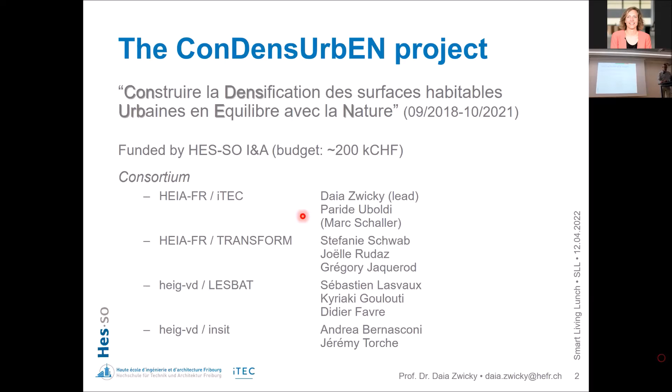The consortium was composed of different institutes within HES-SO. The lead was with us at iTEC, the Institute of Construction and Environmental Technologies. I would like to point out in particular the name of Paride Uboldi, the main collaborator working on this project. So essentially this is all his work. We had a strong implication of Transform of HEIA as well, with Stefanie Schwab above all as a lead. And we had two further members from the location in Yverdon of HES-SO. One group, LESBAT, is specialized in energy of buildings and eco balances. And the last group is associated to timber construction.

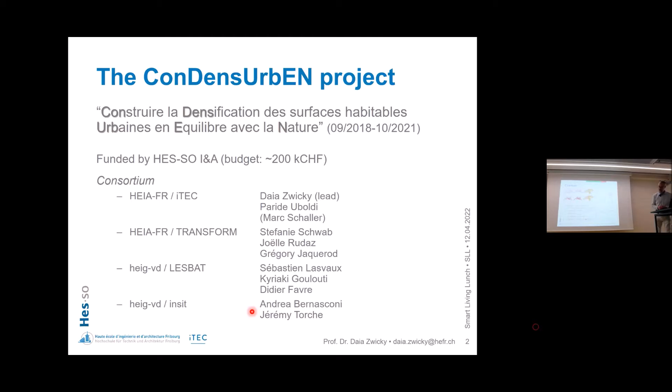Well, we could use industrial fallows, friches in French, like where we are here. So we could demolish everything and build very dense on this zone of the Smart Living Lab. But as we can see in this very zone, there are probably better ways to work with the spaces that are freed at the city center, like creating parks and recreational areas, or locating a living lab, for example. So that is certainly a way to go, but how many opportunities do we have?

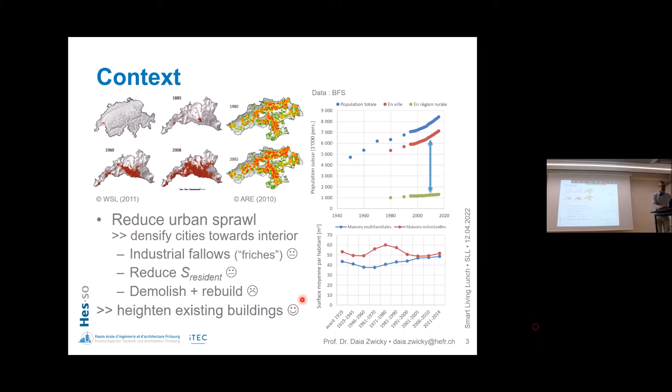So in our opinion, the best way to go is to heighten existing buildings. And this is exactly what we have looked at in this project. What is done today, you can see in these few pictures. Usually it's 1 or 2 stories more, maximum 3, usually built in timber or steel. When it comes to the construction itself, the only thing that counts in the tendering process is money, obviously, while respecting requirements with regard to thermal insulation, acoustic insulation, fire protection, but the ecological impact is hardly considered.

That was the question that we have been asking ourselves. Are there other, possibly better solutions, and how to do them? So one requirement obviously is that the construction should be as light as possible, because as such we can add more floors.

I have to precise, we didn't look at what is the impact on shadowing and stuff like that, but we looked at the individual building and how to construct this. And then obviously we were also interested in the question.

So one thing is the financial impact, one of the 3 pillars of sustainable development, because we cannot spend that much money either. Obviously, respecting any kind of building physical requirements and structural requirements, because I should precise, I'm a structural engineer, so that's what we have been looking at. And we wanted to know, is this possibly opposed to ecological impacts of the added structure? So that's where the EN comes from, equilibrium with nature.

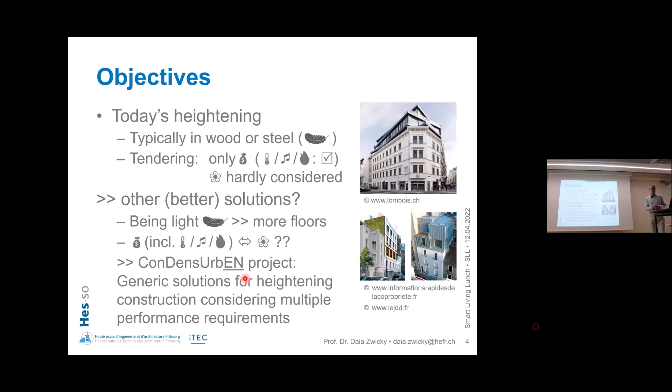And the general objective of this project was thus to develop generic solutions. We didn't go till an execution project, but generic solutions for the construction elements applied in heightening of existing buildings, looking at different performance requirements that are imposed on such constructions. Again, the project limits, we limited ourselves to generic constructions, considering the primary or load-bearing structure, as well as the finishings or secondary structure. From a structural point of view, we did not go to the very last detail, but we did rather something you would call a pre-design.

And in this context, we already limited ourselves more in the sense of we didn't want to mix too many disciplines, in the sense of the walls are built in steel while the floors are all built in timber, because it requires 2 different disciplines on the construction site, which is usually not appreciated.

And we didn't go, like I said, to an execution project, such that we did not really profoundly analyze construction details and connections, etc. But it's rather a general composition of construction elements and what is the impact from an economic point of view, so on the money side, and on the eco balance side, where we've been looking at embodied CO2 or embodied carbon above all.

Also, we did not perform deep studies of building physical aspects, but for example, with regard to thermal insulation, we only made a general check of the U value and not every single thermal bridge considered. And with regard to acoustic insulation, we could frequently rely on existing catalogs that we know that this and that kind of composition does provide the necessary performance.

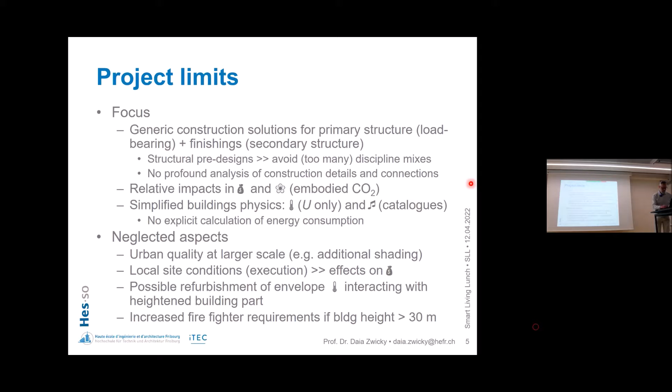So we've been looking at this in the framework of case studies because we wanted to look at concrete cases. We had to, because this determines spans and existing arrangement of structural elements that have an impact on our project.

We started from the eREN projects that were done by Stefanie Schwab from Transform, because within those projects, she developed, among others, construction typologies of residential dwellings, so multifamily houses from 1900 till the end of last century. And this was very useful for us because we had archetypes available with this.

We did neglect some buildings with a current height above 24 meters because we thought there is not that much heightening potential. So it's a bit contradictory to what I just said, but it was to limit our choices. And from those construction typologies, we chose representative buildings as an archetype for intense construction periods.

So one building from just before the Second World War, and one building in the period of the petrol crisis, because they present really typical construction types and modes of the concerned periods, a typical pre-World War II building and a typical post-World War II building that are usually found in different zones. Like the first one is rather at the city center.

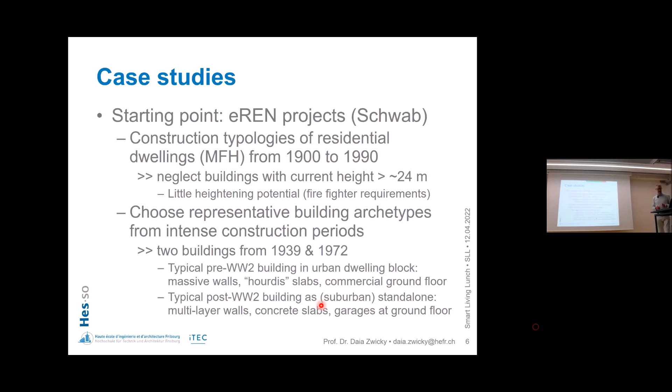While the second building is a typical standalone building, rather in a suburban zone, with multi-layer walls, concrete slabs, and garages at the ground floor. So this first case study is called Borde.

And you can see here we have this hollow block or hourdis slab that only spans in one sense. Essentially, the walls are made of cement bricks. And we already came to the conclusion quite early that we will have to, we assume, demolish what you could call the penthouse. It's usually a little bit smaller than the rest, and the attic, and we construct from there upwards.

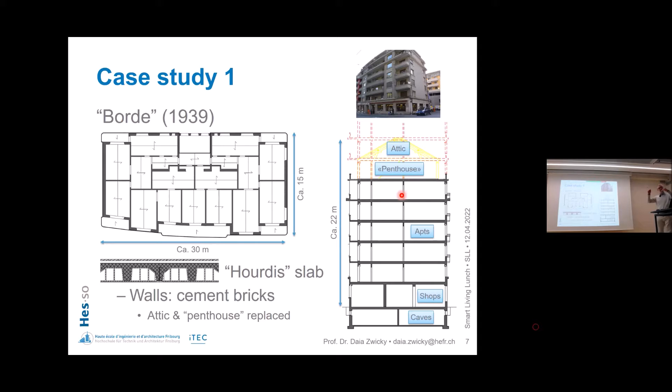The first thing we have been looking at is what is the capacity of the existing structure, with the target that we can identify approximate surface masses of the added floors, because they will definitely have an impact on the materializations of elements that we can apply. And we wanted also to know, do we need strengthening of the existing structure? Or to make it even more detailed, if we applied some punctual strengthenings, would that allow us to add 1 or 2 more floors? So that's the idea behind that.

We took into consideration, obviously, the existing floor plan, and we assumed that we simply copy paste this for additional floors, so that we do not fundamentally change the structural system yet, but wanted to know how many floors we can add, or respectively, what is the dead load per floor that we can allow if we add 1, 2, 3, 4 floors, obviously considering a certain live load.

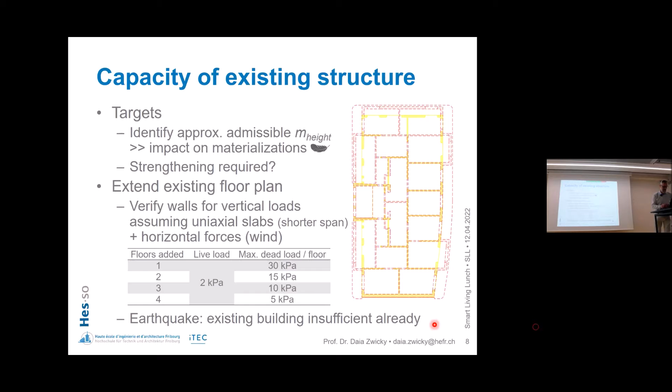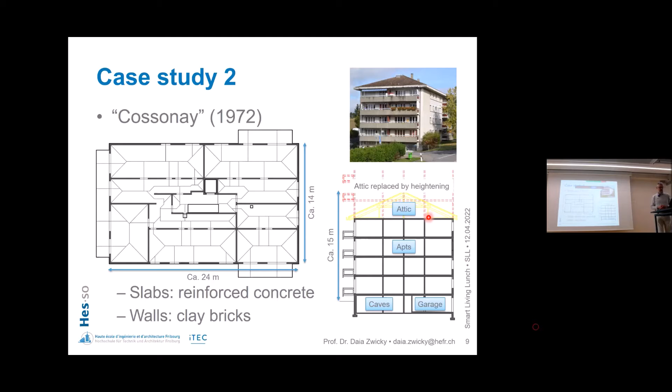The second case study is this standalone building, typical from the 70s, with the walls made of clay bricks and the slabs made of reinforced concrete. Reinforced concrete allows us to admit a load carrying in both senses. Again, we assumed that the attic, which is currently non-residential, shall be destroyed, and we copy-paste the existing floor layout for how many floors we can add.

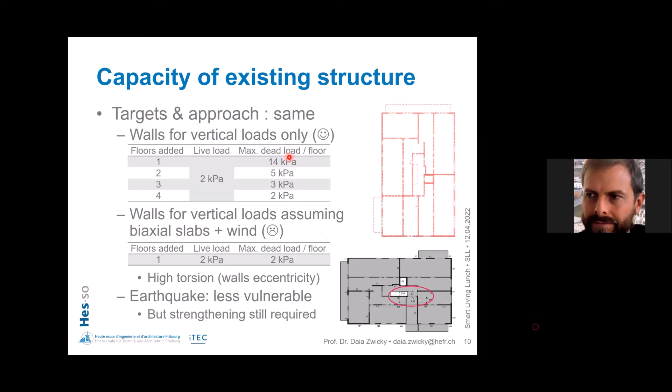We applied the same approach, and we can see if we look at the load carrying capacity of walls for vertical loads only, we can add quite a few floors, like adding 4 floors, still having 200 kilos per square meter for the dead load admissible. But if we look at the combined efforts acting on the stabilization structure, so the walls, from dead loads and wind, we can essentially add 1 floor with a quite modest admissible dead load.

This is associated with the fact that the earthquake acts here where the center of mass is, while the reactions act there where the center of reaction is, and this torsions the whole building and loads the walls additionally. That's why those loads are so low. So we can tell from that we can add very few floors, or we need to apply strengthening, be it for wind loads, be it for earthquake, to add more floors. But this gave us a first idea of how much dead load the slabs above can have, and associated materializations.

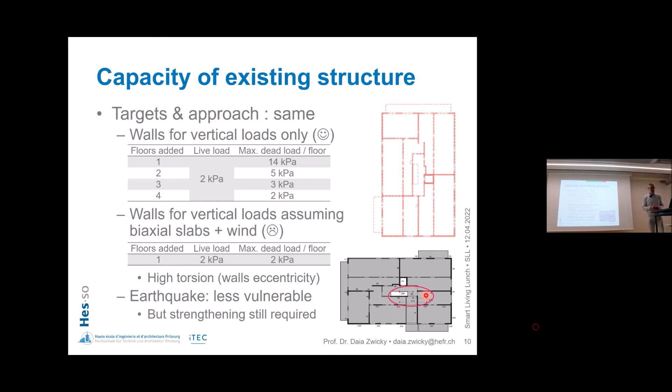So we're now looking more profoundly at the elements of this heightening structure. There are many requirements to be considered. So we have structural requirements. We need sufficient strength. We need sufficient serviceability, so that, for example, floors do not deflect too much or feel like a trampoline. So this requires some minimum thicknesses already. We need to meet certain fire protection requirements, to protect not the building from fire, but the inhabitants from fire.

And we have those building physics requirements with regard to thermal insulation and acoustic insulation, which has different subclasses, like impact noise, airborne interior noise, and airborne exterior noise. So all this has an impact on the compositions of our elements, and many times they have a strong impact on the secondary structure. And this is, unfortunately, a little bit the poor child of construction projects. It has an enormous impact, but it is hardly considered, as you will see later on.

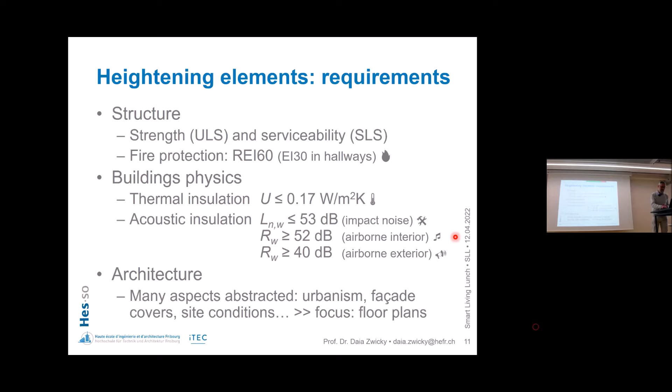We also have looked at what we called an open floor plan, where only core and facade walls would be considered in the loading system. So you see here superimposed, we have really large walls that collect all the forces and bring them down to the existing structure and further down to the soil.

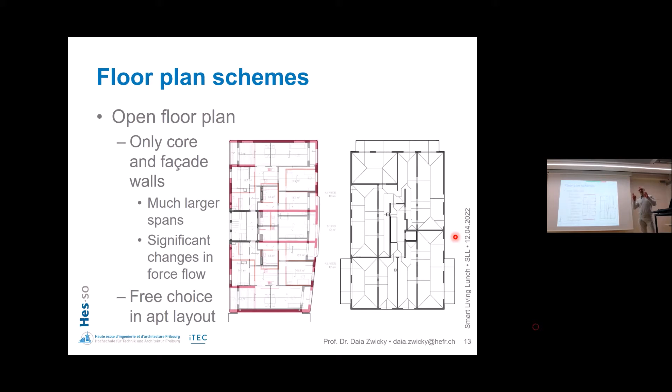Obviously this has a consequence of significant changes in the force flow, but we gain a lot of freedom in the arrangement of apartments and can provide something that is more appropriate for current times. And the same goes for this other building.

These reflections on the floor plan essentially consider architectural requirements on the one hand, and above all, they gave us an idea of what are the spans that we are talking about. We found out then that the first building I've introduced, the Borde building, was worse in the sense that it has the larger spans.

It requires quite important what you call deep beams, mur voile in French. So it's a beam that has the height of a whole story and can collect a lot of forces and bring them down to the foundations and further. You can see this here. This is a deep beam in this section here. So it is a structural element that carries over large distances and can accommodate quite important forces.

As a consequence, we could see that in the one building, we have a maximum span of approximately 11 meters. So we're approaching footbridge spans here already. And the other one with 8 meters, which is quite important as well. So this gave us an idea of what we are talking about in terms of slab spans, and was a necessary basis to do the structural pre-design of our construction elements.

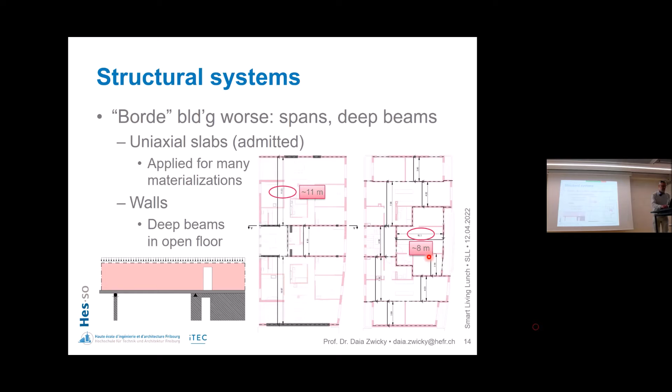We have been looking at many different materializations of slab and wall elements. We could categorize them in the sense that we have elements associated to concrete construction. It's quite intuitive that you will not pour very heavy concrete to construct these additional floors. Still, it is like the reference of what you would do when you construct a new building, and that's why we wanted to consider it.

The same goes for a massive slab, but this time using lightweight concrete, or then we have voided elements like with hollow blocks or pre-stressed and voided. So all these elements had to be structurally pre-designed to know what their thickness must be.

We have then also pure steel construction, what we call CFS, cold formed steel. These are very thin steel elements, so it's extremely light, but very sensitive to stability. And that's why, for example, here you need to add a timber plank that stabilizes those elements.

Further going to composite construction, where we mix different materials in relatively typical ways, like using steel elements in combination with concrete slabs that provide additional stiffness and strength. We could find such proposals in the literature, where we have cold formed steel elements that are insulated or made light with a hollow block made of insulation material, but still adding concrete for additional stiffness. It's a, let's say, commercial system called Coffradal.

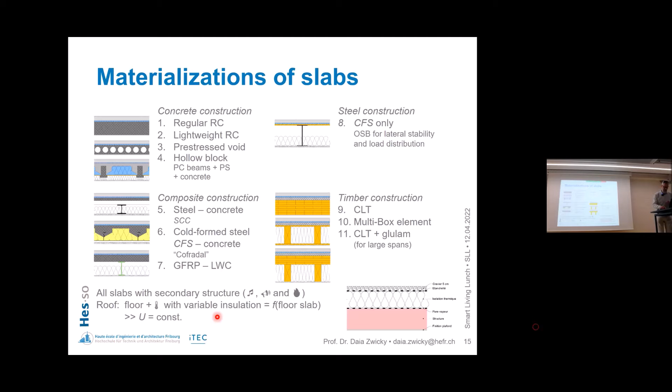So roof, same as a floor slab, but with insulation. And then we had to dimension all this, obviously, for the variable spans. You can see here an overview as it gives you an idea what we are talking about in terms of depth of the total element, in terms of dead load of the total element, and this obviously to be combined with what can we add.

And you can see we can go from something really, really heavy in regular concrete, so almost 1.3 tons per square meter. So that's a regular car per square meter as a dead load, which is extremely heavy, to something very, very light if we construct with these cold form steel elements. We have been considering spans going from 7 to 11 meters.

We essentially considered simple span slabs because we have many unidirectional elements. So like such an element here that has one load carrying direction. Also elements like these, they carry in one way only. It was only for elements made of massive concrete that we considered a certain contribution in both senses or also continuous.

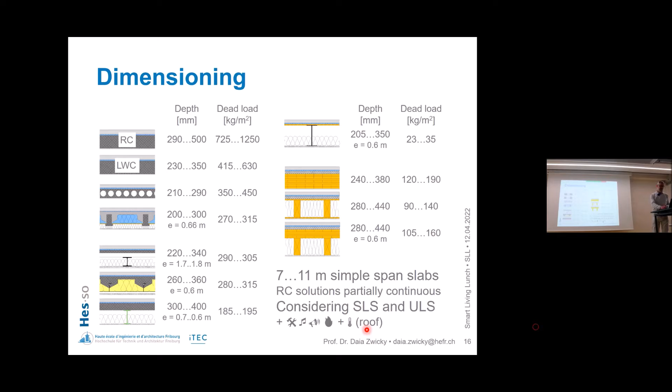Obviously in the structural design, all the requirements that are imposed for serviceability and strength, plus adding all the necessary layers for satisfying building physical requirements. Something similar we did for the walls, again in different categories: concrete construction, steel construction, polymer construction, or timber construction.

We looked at regular constructions like massive walls made of normal concrete or lightweight concrete. We also looked at prefabricated panels that incorporate an insulation made of EPS, but also looking at ultra high performance concrete, with the objective to make those elements even thinner. Because this is something I should have probably mentioned at the very beginning.

If you want to construct very light for your heightenings, you can do it in two ways. You can take usual dimensions with light construction materials, so let's say timber as a light material in a regular dimension of, I don't know, 20 centimeters. Or you can take much heavier, but higher performing materials and make very thin elements. And as such, the mass overall is comparable.

And that was exactly the way we have looked at it in the context of these conceptual designs for those different materializations. We also had to add some non-structural walls, but there we made our life easy. We considered one type of composition for internal non-structural walls and another type for external non-structural walls to not make life even more complicated.

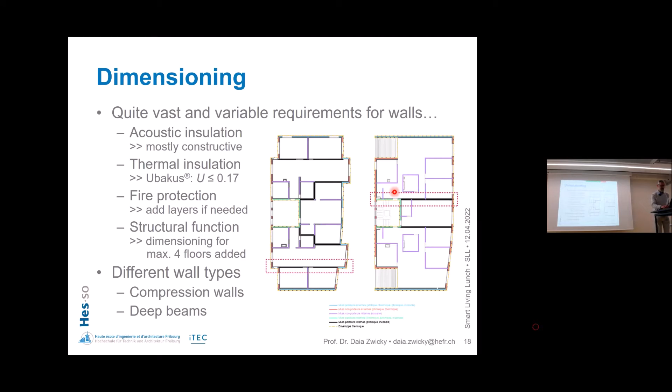So we have walls that carry mainly vertical loads only, but then we also have these deep beam walls like the one here or the one there that catch a lot of the additional loads and have to bring it down to the existing elements. For the compression walls, it's relatively easy. You look at it as if it was a column that is 1 meter wide, and you design as a structural engineer must. I don't bother you with those details.

But more interesting are the deep beams, because they have to bridge quite important spans. And we wanted to look at different materializations, like I said. So concrete walls that you usually design with strut and tie models. Steel walls were constructed as a truss, so we could hide diagonals inside to have the necessary structural system.

When we did it in glass fiber reinforced polymer, this is also something that we looked at in an earlier project. How can we make this load bearing if we bolt panels on GFRP profiles?

Structurally, it works. So we also considered this approach, or last but not least, a massive timber wall made of cross-laminated timber, for the different construction modes being associated to the main construction material.

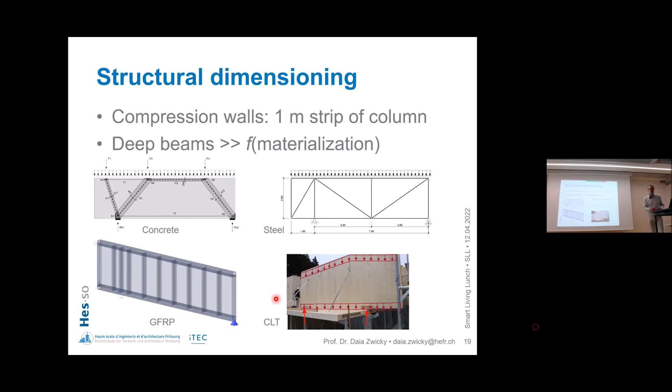Then we also had to look at what you call shear walls. It's the walls that stabilize your building for wind and earthquake, and above all, at the existing shear walls. So I already pointed out that the existing shear walls already require strengthening in the current state of the building. It's always a question if the intervention is proportional or not. But if we're gonna add floors, then the intervention definitely is proportional.

So we had to bring that a little bit further down, simplify it a little bit further. That's why we said we're only looking at two different categories of strengthening: a light strengthening or a heavy strengthening. Heavy is easy. We take the existing wall as a lost formwork and we simply concrete the new reinforced concrete wall against it. It's done in practice. It's not something we've invented. And there you can accommodate roughly any kind of earthquake or wind load you want. No problem, because you add an element.

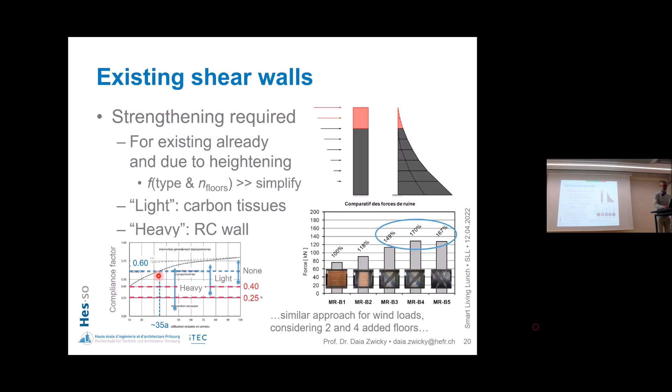And the same we did not only for earthquake, but also for wind loads, considering 2 or 4 added floors. So this allowed us to identify how many elements we need to strengthen.

Now, these slab elements and wall elements, they need to be combined to construct the added floors. And there would be an almost infinite number of possible combinations. If you say, okay, these are all the slab types we've looked at, these are all the wall types, theoretically you can combine any one with the other. And well, we had a comfortable budget, but not that comfortable, so we had to limit ourselves.

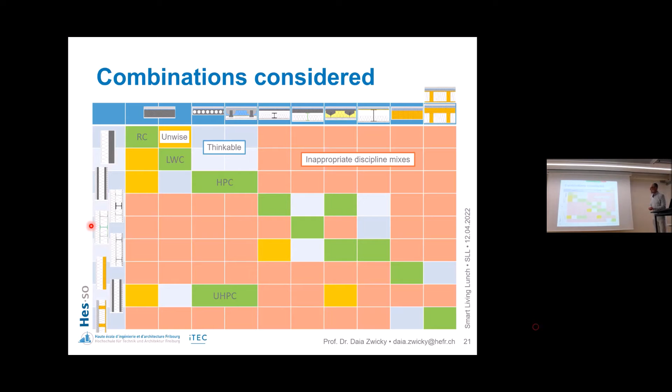And we've been looking at the outliers, so to say. We thought, okay, here we have rather lightweight regular concrete construction, and it would make sense to combine them with lightweight wall construction because elements are thin, or we even combine it with higher performing concrete and thus thinner elements, and that's how the outliers can be justified. Was that a reply to the question? Very good. Okay, so these are the combinations we've been looking at.

In terms of evaluations, we know that we satisfy building physical requirements, we satisfy structural requirements, and we wanted to evaluate the impact of those combinations on construction cost and on ecological impact or embodied carbon. The construction cost we did rather in a qualitative way. We took the material quantities, multiplied them with usual unit prices per material and added something for the mounting of the whole thing.

This is quite approximative, obviously, because the effective construction cost will be very much impacted by the specific site location, access, where can you put the crane, can you put the crane anyway, etc. But we wanted to compare those materializations qualitatively, and that's why we did a normalization to our reference, which was in our case timber construction, which is usually done today. So is the other solution more costly or less costly than timber? Or then we did it within the same material. So it's a relative evaluation, so to say.

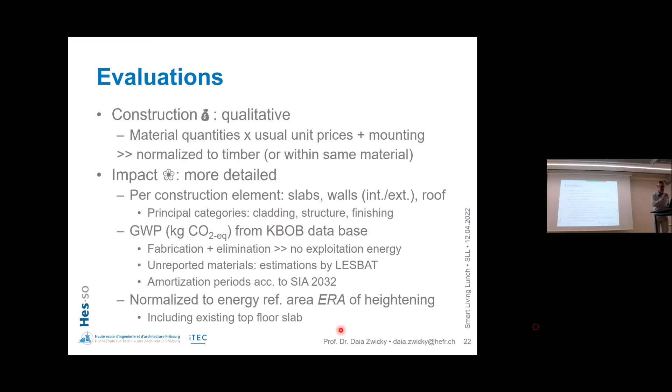Now, finally, some results after all these explanations. Here you can see the results for two floors added with a restrained plan. I'm totally aware that you can read nothing, but I'll give you some explanations. For one certain materialization, you can always see two columns, and this variation is associated with different kinds of secondary structures that satisfy the same requirements. So this gives us a range already.

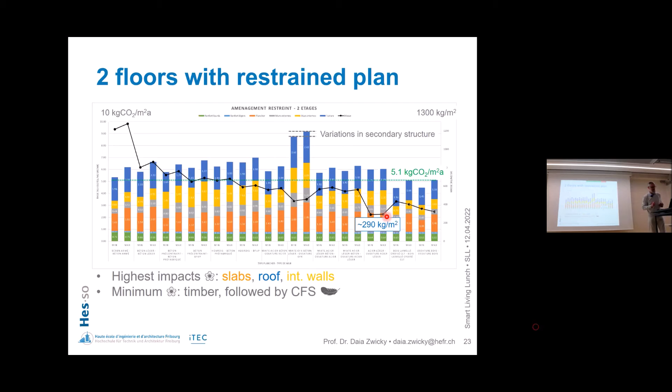From the colors, you can tell the highest impacts are hidden in the slabs, followed by the roof, and then the interior walls. To give you an order of magnitude, the reference is timber with 5.1 kilo CO2 per square meter and year. This gives us the minimum eco balance, followed by cold formed steel construction, which is relatively close to that, the lightest one, down there. But still, it's already 290 kilo per square meter. It's supposedly very light, but not as light as you thought.

All the other solutions, except for the GFRP solution, which is the total outlier above overall, are relatively close to each other. So we can say, if instead of using timber we use concrete, we add like 20 to 45% in embodied carbon. If we use steel-based solutions, it's like 15 to 35% added, obviously considering the maximum in secondary structure.

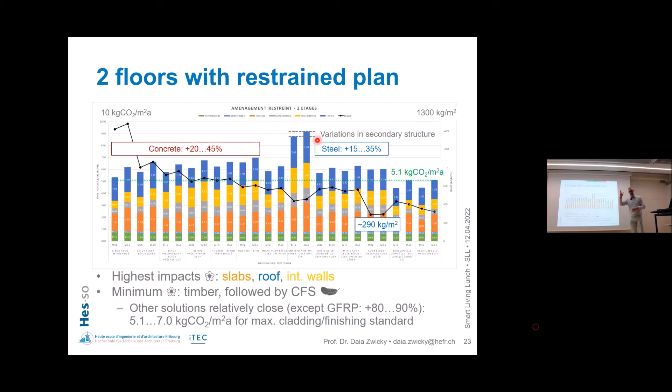So if you look at money, choose lightweight concrete. If you look at eco balance, choose timber. If you want to be as light as possible, choose cold-formed steel. If you would make the elements rawer, so you can omit certain finishings and claddings, then you can still reduce the impact by up to 15% in both senses, cost and embodied carbon, so non-negligible. But you will live with a rawer element.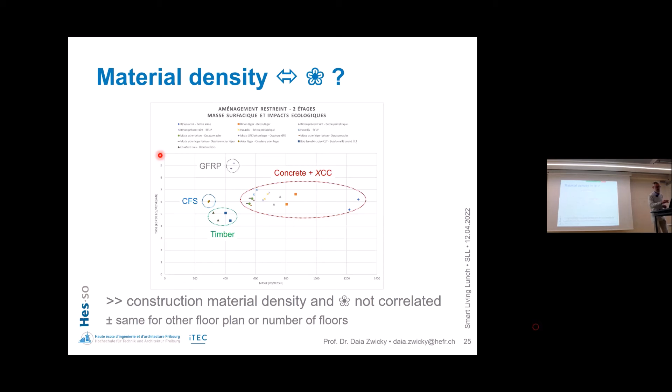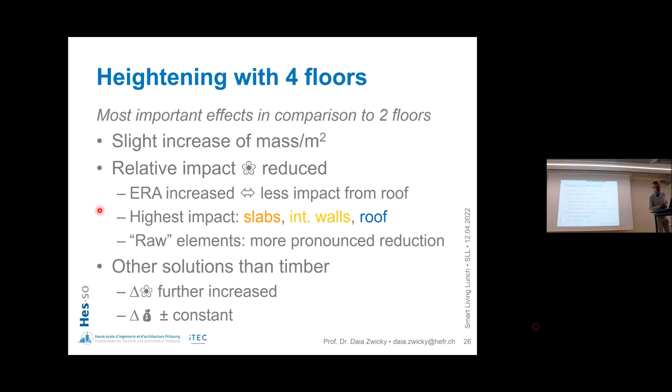Same for a heightening with 4 floors, just the most important results. We have a little bit of increase in the mass per square meter. The relative impact of eco balance is reduced. Obviously, you add more floors, so overall you add more embodied carbon, but that's associated to the fact that the energy reference area is increased. Still, the highest impacts are in the slab, but now followed by the walls and then the roof. And using raw elements would result in a more pronounced reduction. We can say here also, for other solutions than timber, the eco balance is simply increased and the cost remains more or less constant.

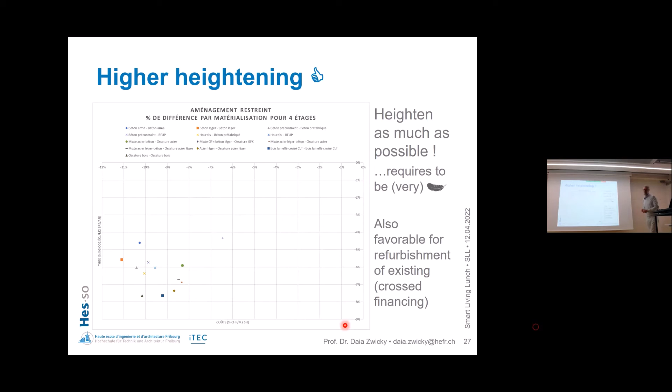We can tell from this figure, for 4 floors, heightening as much as possible is favorable, because it reduces the relative cost impact and it reduces the relative embodied carbon impact, and it's also favorable if we further consider refurbishment of the existing structure, because then we can do some cross financing: the rent from the additional floors can pay to refurbish the existing building. So that's why it's interesting to add heightenings as high as possible.

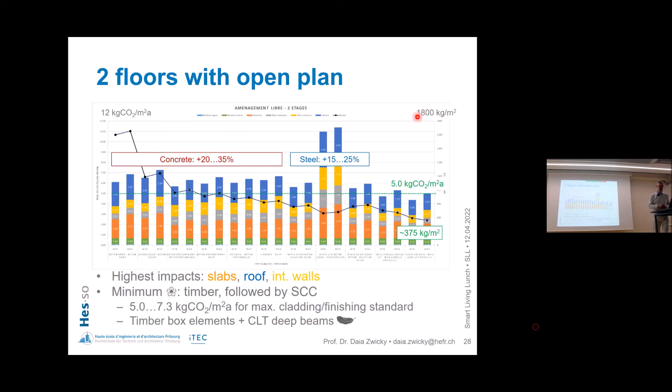So as we have an open floor plan with large spans, it requires timber box elements, and the deep beams using an open floor plan need to be in CLT anyway, and this is also the lightest solution, as I just mentioned. With regard to relative impacts in construction cost and embodied carbon, the differences are less pronounced. So again, the reference here is the timber construction using box elements for the slab. CLT is essentially equivalent.

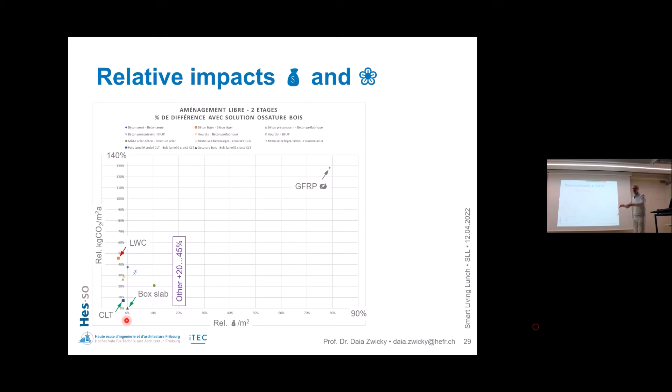Lightweight concrete, again, maybe some economic savings, but that probably dilutes in the precision of our calculations, but we can tell for sure that it will increase the embodied carbon. So anything else than timber will result in a more pronounced embodied carbon impact, plus 20 to 45%, except for GFRP that is out of the race anyway, in comparison to the other materials. So we can have a very little gain in economic impact. Still, if you want it as low cost as possible, lightweight concrete; as ecological as possible, timber; as lightweight as possible, timber. All other solutions are worse in ecological impact.

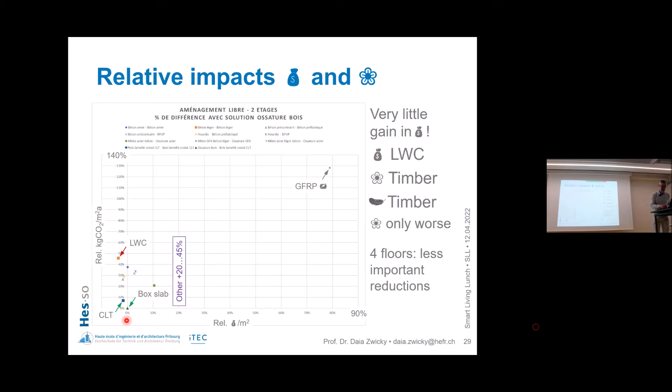If you use a rather massive or heavy construction, the impacts are mostly hidden in the structure, while if you construct very light, so cold formed steel or timber, it's essentially in the cladding and finish. But the sum of those may result in comparable impacts. For the roof, it's above all the cladding, including the thermal insulation. So optimizing that thermal insulation material would probably be a good thing to do.

And for the interior walls, it's essentially in the structure, except for timber and steel, where again, it is in the finishing, so similar to the slabs. We could always see in those evaluations that the strengthening measures that we apply have a very modest impact in comparison to the added floors in terms of eco balance, and they definitely improve the existing building.

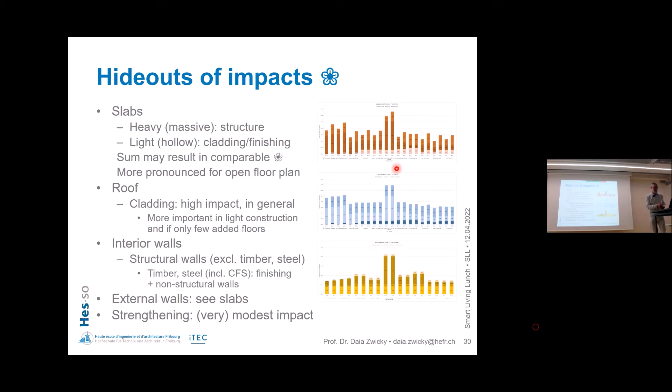So to finally conclude, I've been talking for a long time already. So the taller the heightening is, the more favorable it is. But the taller you go, the more compromises you need to do on the floor plan layout. You cannot do the open floor space and add like, I don't know, 8 floors. That's not really possible. Well, it would be possible, but you do a lot more important interventions. The floor plan and the floor number obviously have an impact.

If you use a rather open floor plan, it's architecturally definitely more convenient, but it results in longer spans, so you need lighter construction. And that's why I would recommend going for steel or steel concrete composite construction, hollow blocks, CLT, or then if you use timber box, pre-stressed concrete or sandwich walls, they can be applied for any kind of combination of floor plan and floor number, but the number of floors should be limited to roughly 3.

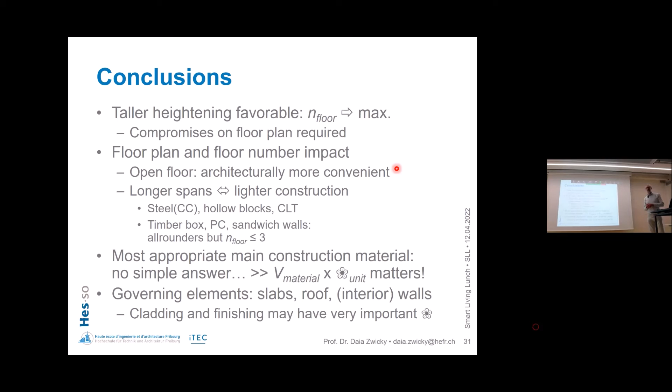There is no simple answer to the question, which is the most appropriate main construction material. There is really no obvious answer to that, but I think the most important is think of what volume of a material is used and what its unit embodied carbon is, and the product of that is what matters. The governing elements are slabs, roof, and interior walls, and the impacts of cladding and finishing may be very important. And so this should be looked at, and don't try to optimize only the structure.

So last but not least, recommended materializations. So two floors added is a modest heightening. If you use this with a restrained floor plan, go for timber, possibly for cold formed steel if you want to be as light as possible. If you want to be as economic as possible, okay, you can do that with lightweight concrete, but you add 30% embodied carbon and you triple the weight.

Maybe to round this up, if we look at 4 floors with open floor plan, the most ecological solution is using timber. It may be a little bit more costly than other solutions, but it is also the lightest way of constructing. And if you want to be as cheap as possible, you would rather go for pre-stressed concrete void slab in combination with high performance concrete sandwich elements, but you will have to live with 30% embodied carbon added and 120% weight added. So there are different combinations possible, and it depends on the target that you set yourself. Does it have to be as ecological as possible, as light as possible, as cheap as possible? And then you come to another conclusion.

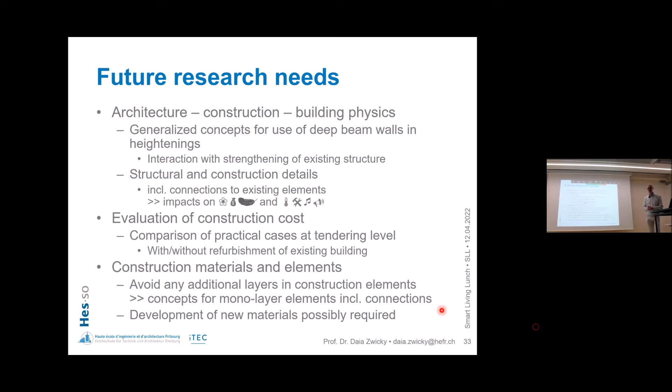That's definitely a thing to go. Or then we should try to target more mono-layer elements so that you do not have to add many layers, including their connections, which may possibly also require developing construction materials that are not available yet. So like my famous wood-based concrete, for example, but that's just a parenthesis.

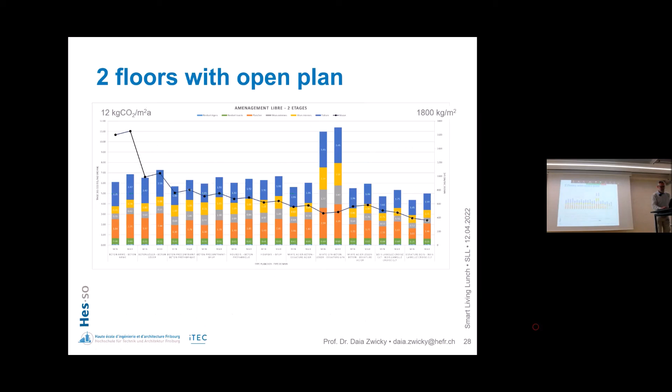Yes, thank you very much, Daia, for your presentation. I have first one question about the method. You did consider two options for the heightening. One is continuing the existing floor plan. The other one is this idea of deep beams. Normally, if you read in literature, there is a third solution, which consists of, how do you say that? A sort of a load distribution platform that you put above the thing. Why did you not consider this solution?

Load transfer slab. Yeah, that is a possible solution. The issue with that is these are elements that are usually really massive in dimensions. It is often done in concrete, at least in new construction, because there you have a similar approach. Or then you have a really complicated construction made of steel, probably. Well, we just thought it's maybe not challenging enough to simply say, okay, now we have a slab that distributes everything as we want.

We also thought it adds a lot of height, not useful height, but we wanted rather to exploit the existing elements as well as possible. And yes, obviously it is a third solution. You can do that, but we thought that the deep beam approach is more promising.

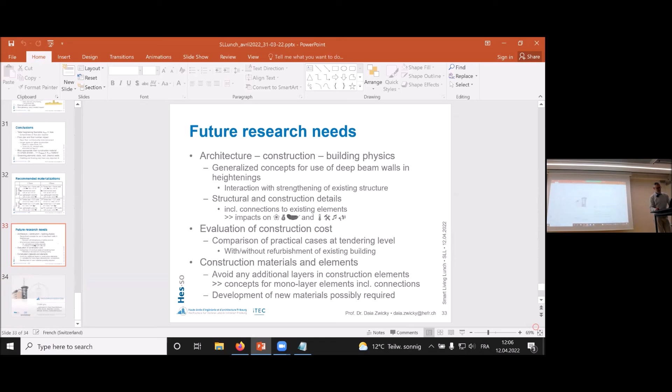This needs special care during the construction, but from an ecological point of view, and I think it's now really important to reduce the carbon impact of construction, I would say that there is a clear recommendation to do this kind of construction in timber. I entirely agree. I totally agree. If you look at embodied carbon only, then it becomes obvious that we're going to do timber. It always says timber, timber, timber.

The issue, or not, and that's not an issue. I mean, everything with regard to economic impact will fundamentally change when embodied carbon is finally taxed, and then timber is even more at the forefront. That's obvious, because you see the additional embodied carbon that is added, like a third or almost half of a timber construction. So then it's not the most economic solution anymore to use lightweight concrete or pre-stressed concrete, obviously.

But this is not a regulation that we currently have. And a project developer is, unfortunately, for the time being, still not that interested in the first criterion, but rather interested in the two following ones. I agree with you that this is the case, but on the other hand, we are the ones that promote this future habitation, and I think we should really promote these more ecological solutions.

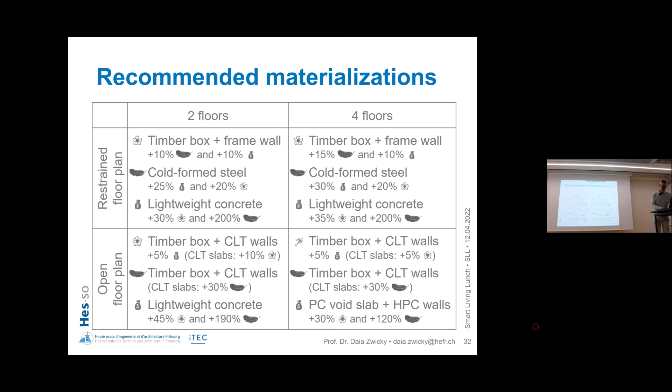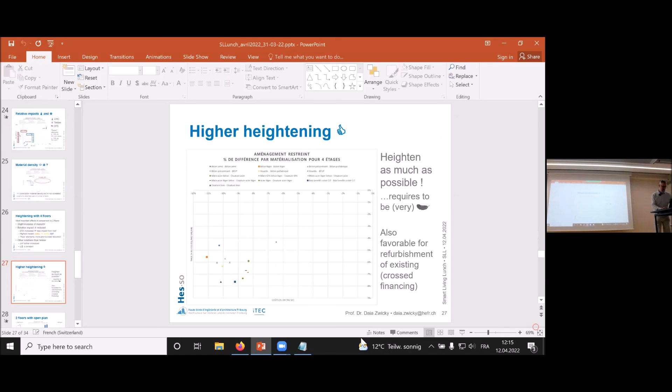No, but something I was quite interested in is that if we want to have, for example, a good ecological balance, the design of the extra floors is quite important for the architects, and we have more constraints than if we have a bigger ecological footprint, if I understood well. The design of the floor is not that free depending on the structure we use. That's where I feel the architect and the design of the space enter the question.

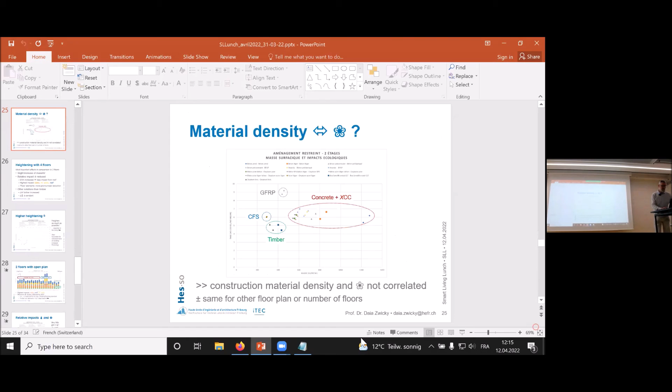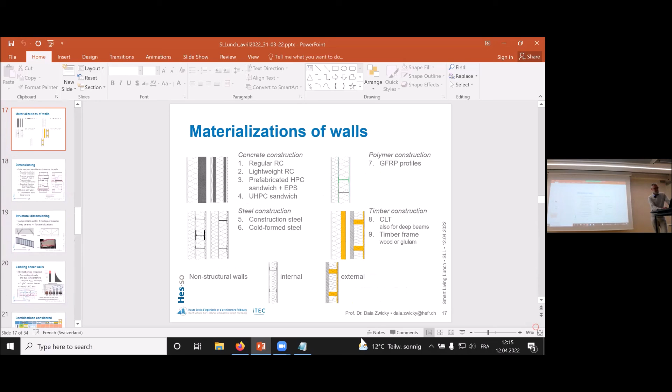I don't remember where. I don't have that with me. But you mentioned that. Yeah, I was looking. Anyway, they are constrained about the design inside the new apartment or the new floor. And if we have not an open plan, yeah, it was about open plan.

Yeah, yeah. I mean, if we have such an open floor plan with very few structural elements inside here, we can more or less do what we want, we can subdivide it as we wish, and so we can provide room sizes that are appreciated today. But there is an impact on the existing structure, and above all also an impact on the elements of the heightening. And so it's always a compromise. You have to buy one thing with another in the end.